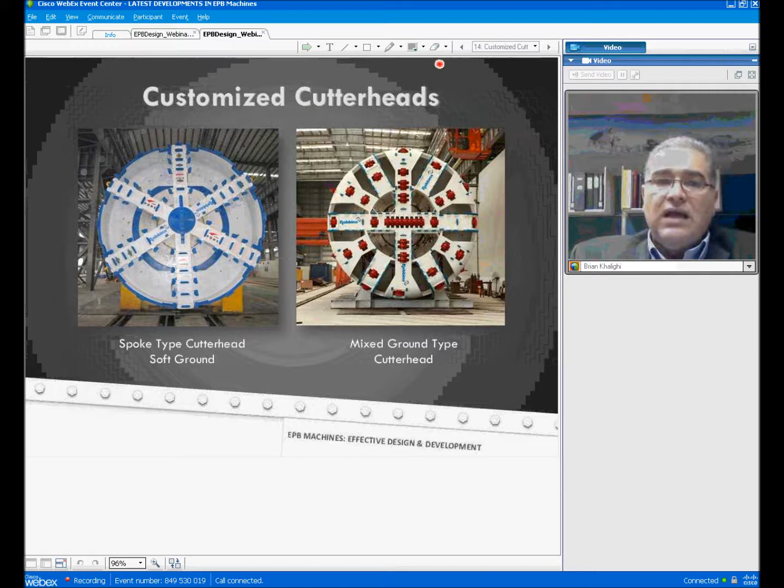In mixed ground conditions, there is a possibility of the existence of boulders, and there's only a certain size of boulders that could be handled and ingested by the ribbon screw conveyors. For that reason, we have to limit the size of the boulders that can enter the muck chamber and eventually into the screw conveyor by controlling the opening size of the Cutterhead. So this one is a fairly closed design of the Cutterhead, and the one on the left is a fairly open design of the Cutterhead. And they both have their own applications.

Obviously, we can install various different cutters on the Cutterheads. For Cutterheads that are designed for mixed ground conditions, we do install single disc cutters on the face and gauge areas, and double twin disc cutters in the center area to minimize the space required for having these disc cutters installed at a proper spacing. And for pure soft ground applications, we have scrapers and knife edge bits, the type of cutters that are shown on the right-hand side. Obviously, in mixed ground conditions, we install a combination of disc cutters and soft ground tools on the Cutterhead.

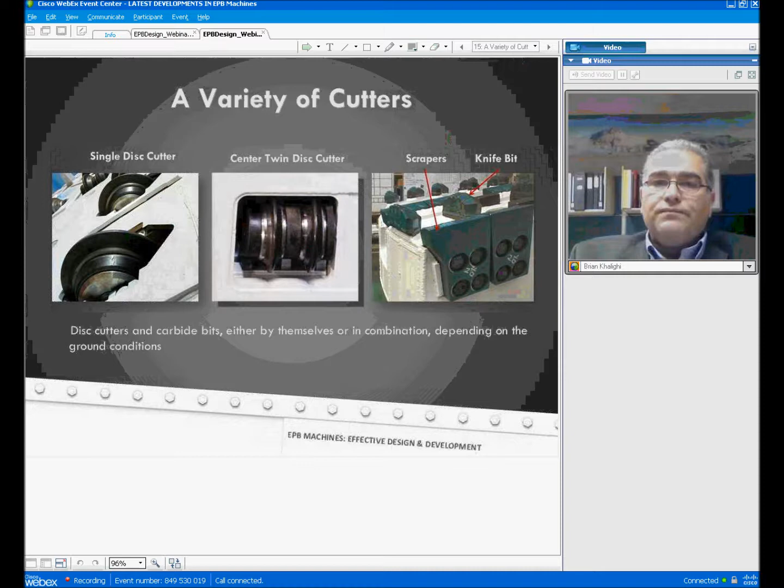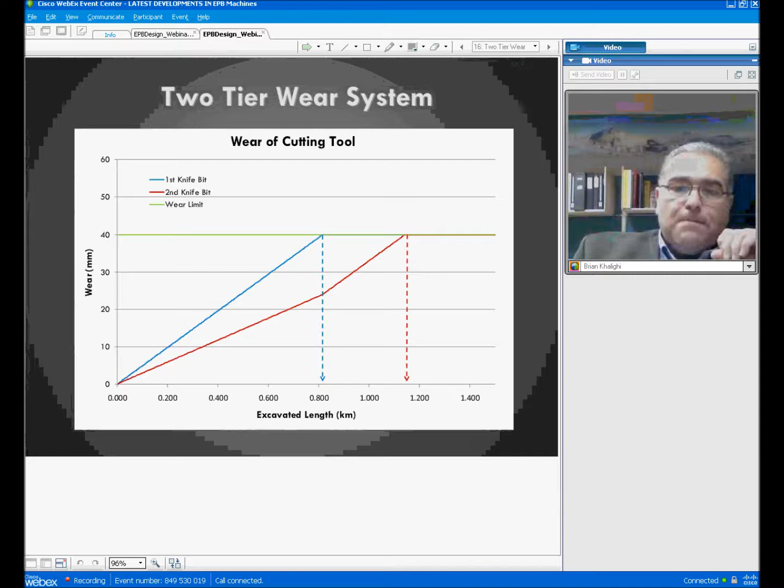One interesting thing that we're doing at the Robbins Company is that these soft ground tools that we install on the Cutterheads, we have two sets of them. One set is installed on the Cutterhead slightly prouder than the second set. In other words, the standoff, the distance from the tip of the cutter bit to the face of the Cutterhead on the first set is slightly larger than the second set. The advantage of this kind of installation is that the first set, which is standing prouder than the second set, obviously wears faster and wears first.

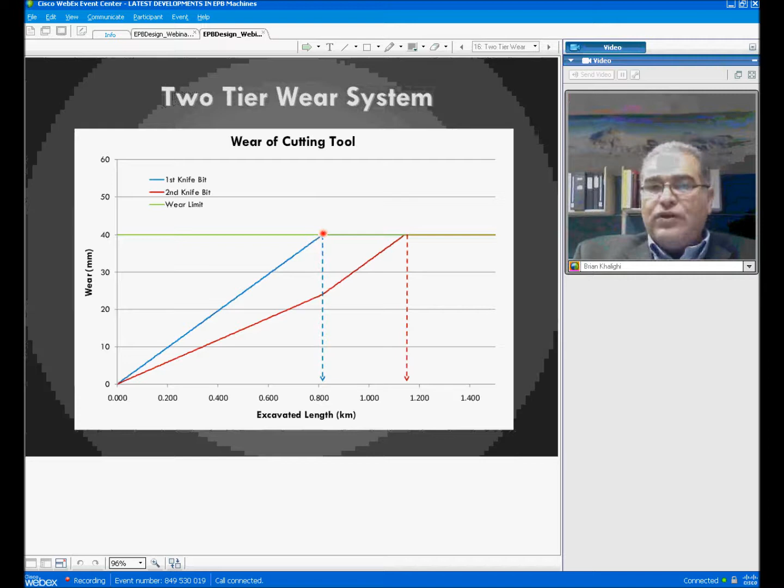And these two graphs are an indication of the wear pattern of those types of installations. The first cutter set, which is shown in blue, let me turn my pointer on. This is the wear pattern of the first cutter set, and let's say that the first cutter set can actually last for 800 meters of tunnel excavation. At that point, these are totally worn out, but the second set, which is sitting slightly below the first set, still has some life left in it, and they continue. The machine can continue boring and excavating for another, let's say, 400 meters, which is 50% of the first set, and that prolongs the productive life of the cutters before the intervention.

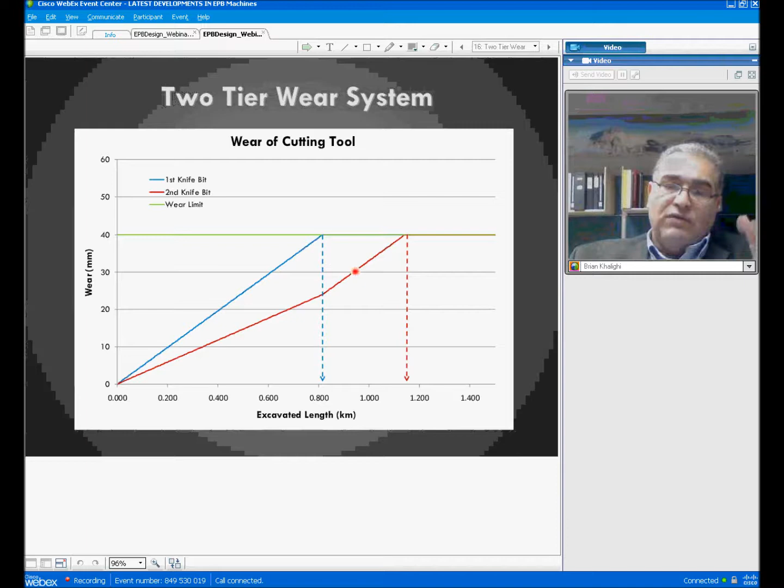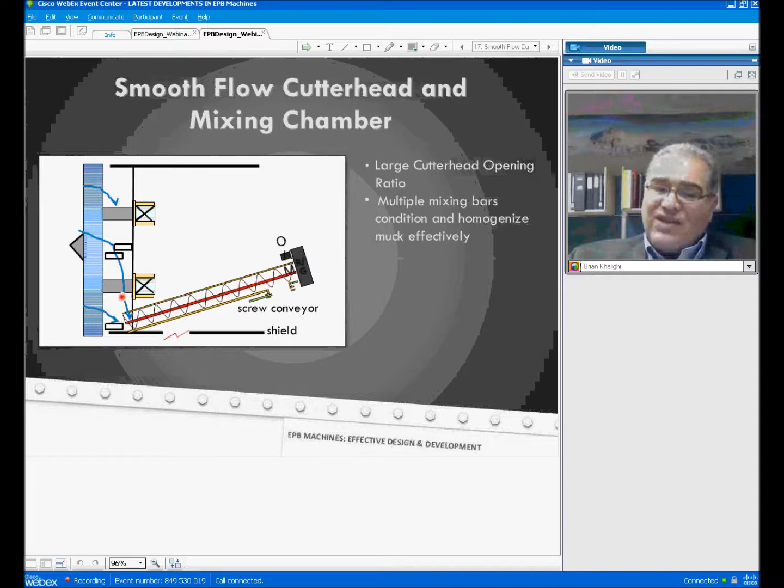Again, smooth flow of the material around the Cutterhead is a very important criterion for design of the Cutterheads. Large Cutterhead opening ratios allow material to smoothly flow from the face to the inside of the pressure chamber or the muck chamber. And another important aspect of Cutterhead design is installation of mixing bars strategically to constantly agitate and mix the muck that has entered the pressure chamber, to homogenize it and to make it flow smoother so it can flow down to the intake of the screw conveyor and naturally feed into the screw conveyor. Mixing bars are very important because if they are not placed correctly, they create areas of stagnant muck, which create problems like high abrasion and lack of proper flow of material into the screw conveyor.

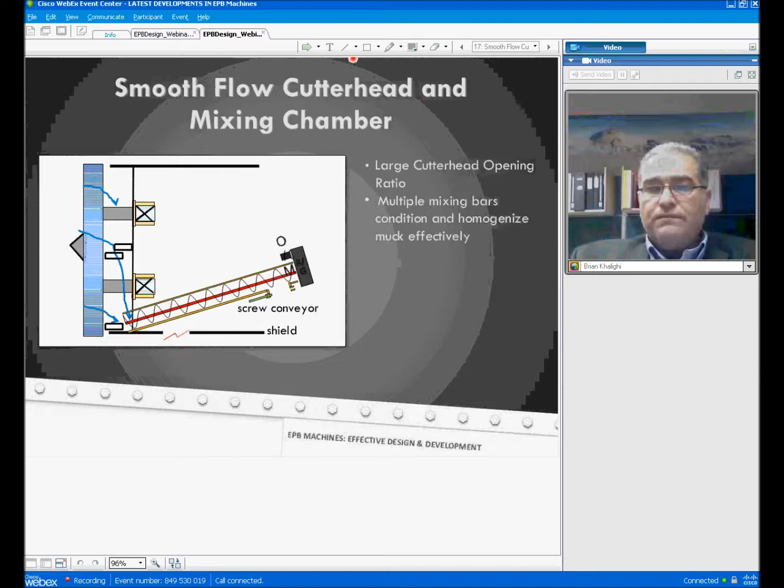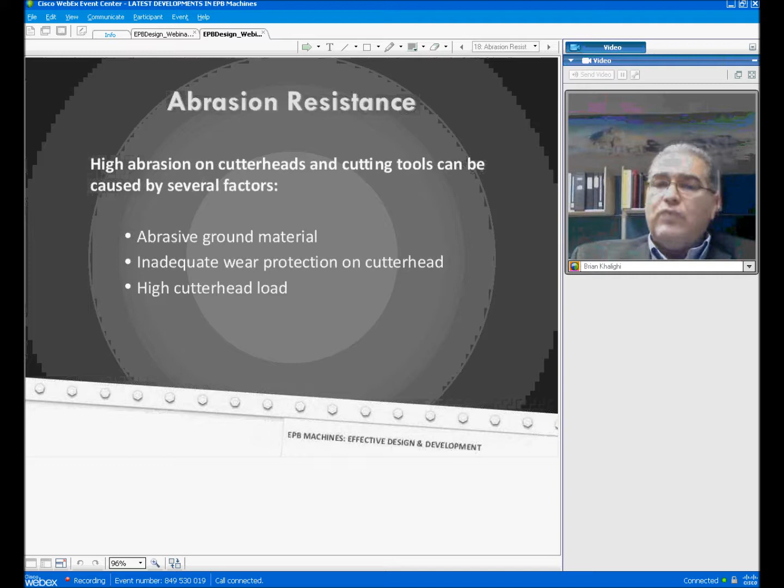The high abrasion on the Cutterhead and the cutting tools can be caused by several factors. Obviously, the first one is abrasive ground material. Then, secondly, it's the design of the Cutterhead. If inadequate wear protection measures are taken, then the base structure of the Cutterhead wears fast. And if there are high loads on the Cutterhead, if the pressure on the face is high, that results in an increase in Cutterhead abrasion. The job is to minimize and to control Cutterhead abrasion.

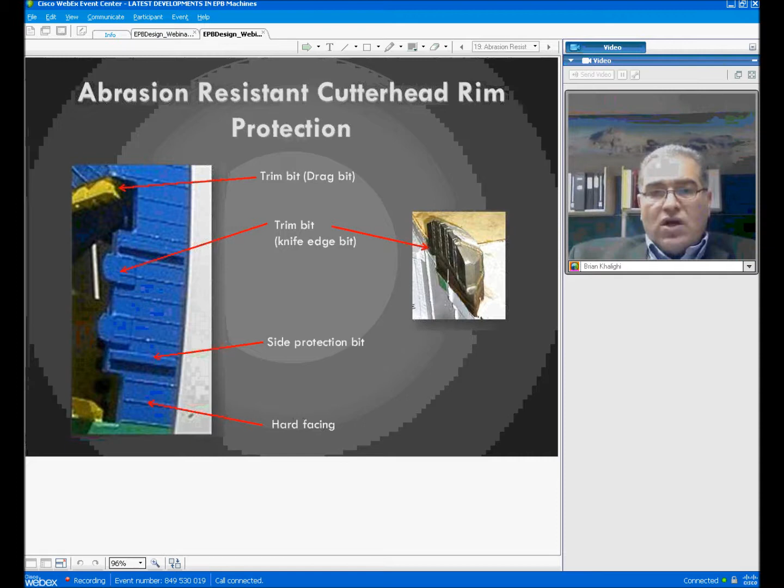We install several wear protection bits and cutters in multiple directions around the periphery and on the rim of the Cutterhead structure. These are trim bits or drag bits, which are shown here, and another type of trim bits, knife edge bits, which are mounted to the rim of the Cutterhead. This structure is basically the outer surface of the Cutterhead, the periphery of the Cutterhead. And then there are side protection bits, which are these bars here impregnated with carbide material, very hard and very resistant. And these are mounted to the rim of the Cutterhead structure at a certain distance and all the way around to protect the base plate of the Cutterhead from abrasion. And the last line of defense is the application of hard-facing beads immediately on the plate that goes around the Cutterhead.

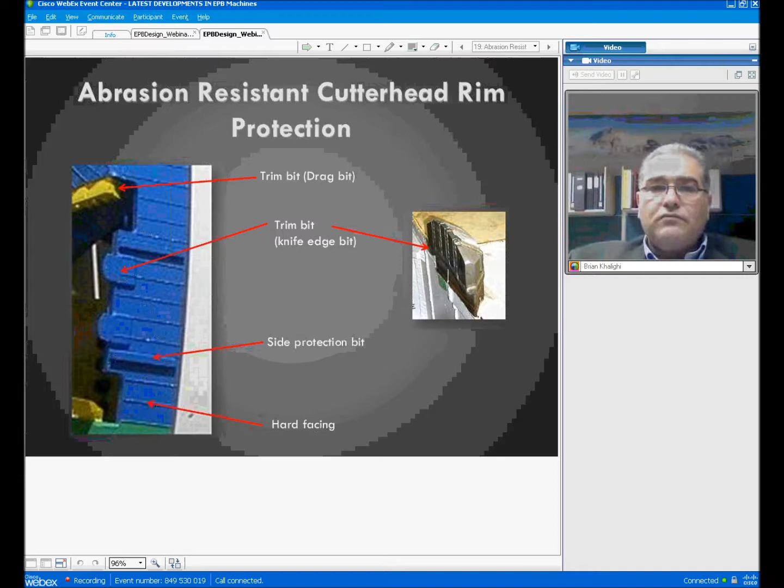So question number 4 is up, and we are ready for the next question from Desiree. This one has 2 parts: what are the most difficult ground conditions for an EPB, and are there certain ground conditions where EPBs should not be used?

Well, I'll ask Mr. Kanda to answer this question, if you'd like to. I can take it if you want. Do you want me to take it? Yes.

The experience has shown that the most difficult ground conditions for EPB application are most challenging. I wouldn't say it's difficult and challenging, but it's not impossible to excavate that kind of ground condition. It's a mixed ground condition, where the lower half of the face is very hard rock, like granite, and the upper half of the face is soil. We typically see this kind of formation in Singapore, and we have been able to excavate that kind of material, but it was challenging. So I guess that is the answer to the question.

Is that fine? Okay, I think we are ready to go to the next slide.

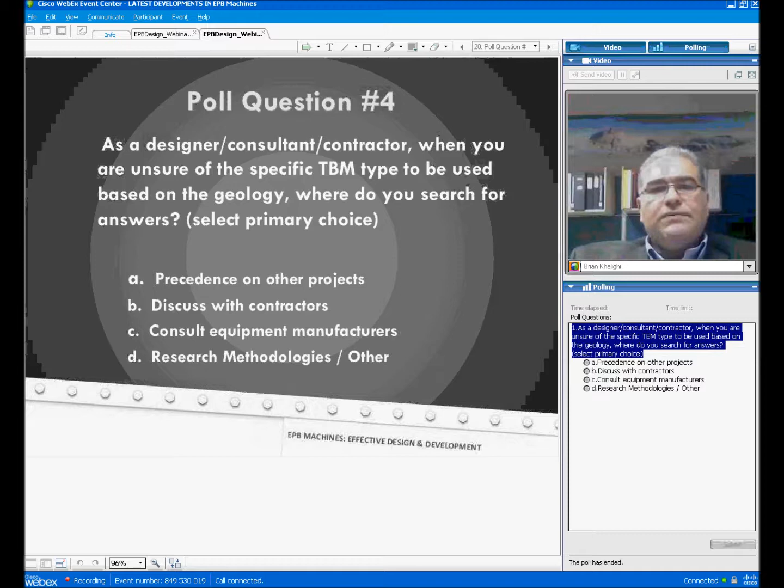Now that you're done with the Cutterheads, we're going to talk about the next very important component on EPBs, and that is the screw conveyors. We believe that the screw conveyor is the answer to many common problems that happen in soft ground tunneling.

Here I will show you a video that basically explains the operation of screw conveyors. As explained at the beginning of the presentation, you will hear the sound on your PC speakers. If you don't see the video, this presentation is being recorded and it will be available online for you to go back to in future and see the video.

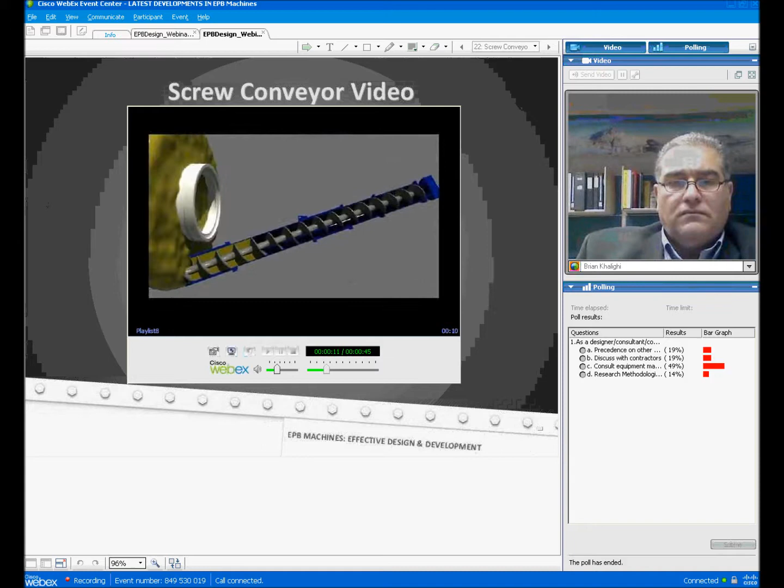Pressure differential between the chamber and the screw conveyor draws the muck into the screw conveyor. As this happens, the muck's pressure is reduced from ground pressure to atmospheric pressure. The depth of the tunnel, the ground material, and the water level above the tunnel determine the ground pressure.

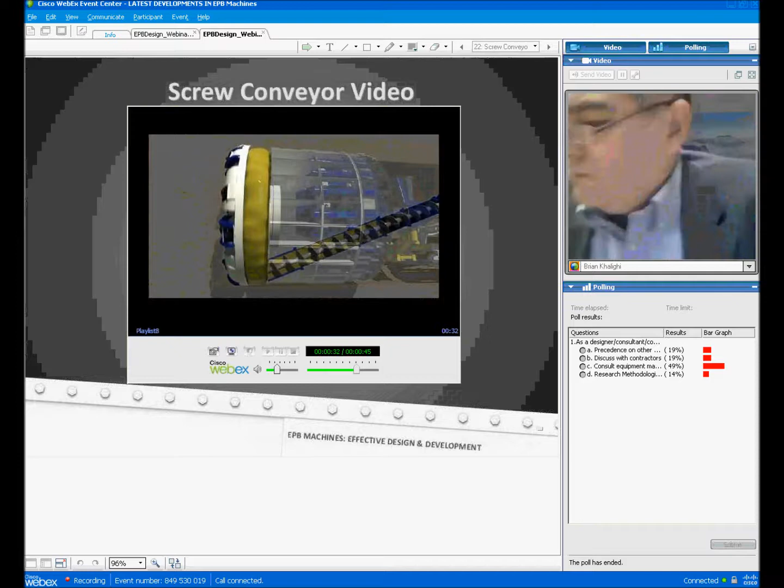In the case of lower ground pressure, only one screw conveyor may be needed. For projects with high ground pressure, Robbins installs two screw conveyors in order to bring down the pressure smoothly. After passing through the screw conveyors, the muck can be transferred to an open belt conveyor and then removed from the tunnel by muck cars or a conveyor system.

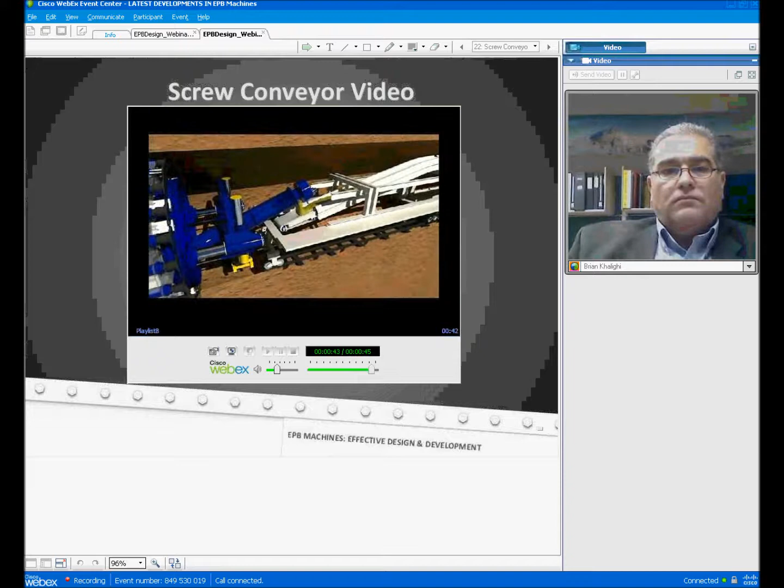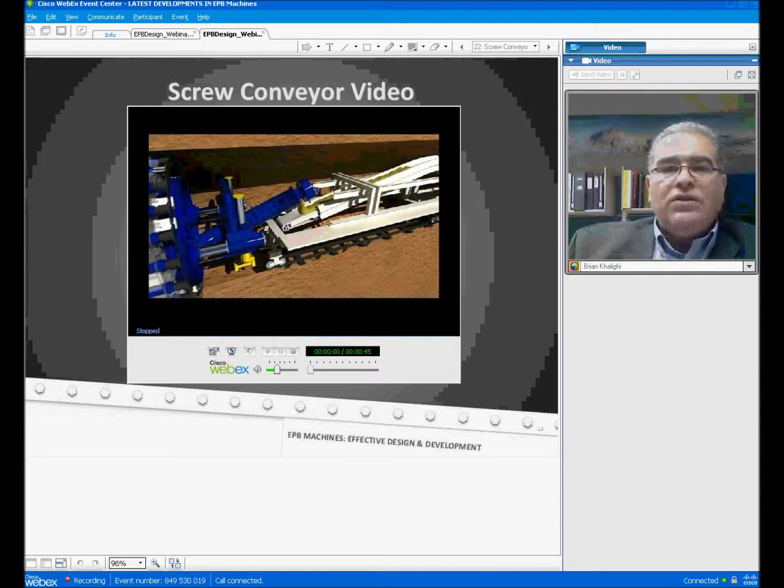I guess we are ready to move on with the rest of the presentation. As I said in an earlier slide, Cutterhead loading is a contributor to the abrasion of the Cutterhead.

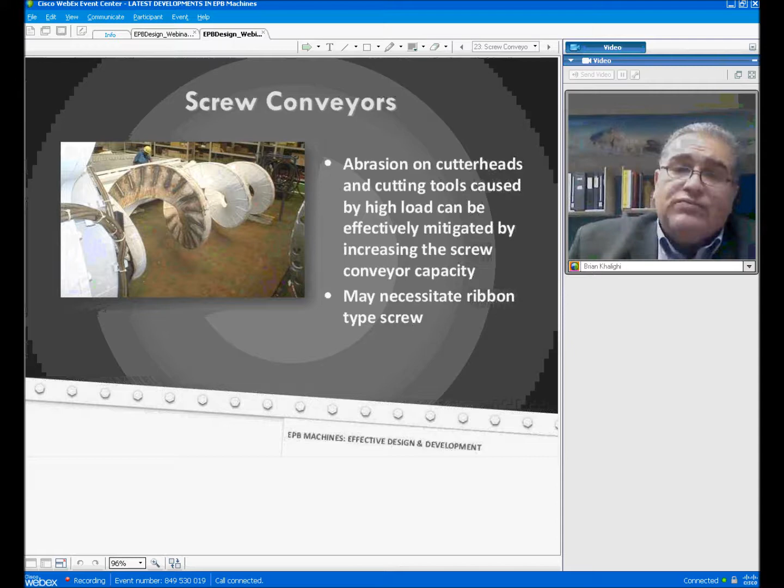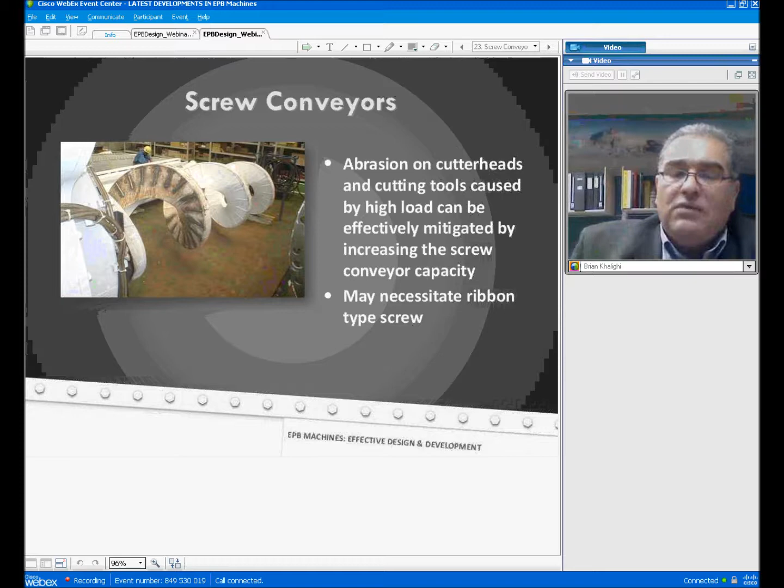To minimize and mitigate the high loads on the Cutterhead, the screw conveyors should be used effectively, and they should have the correct capacity. In some cases, especially in mixed ground conditions, we should have a ribbon type screw that allows removal of boulders from the face. So the screw conveyor actually contributes to mitigation of wear on the Cutterhead by optimizing the material flow from the pressure chamber.

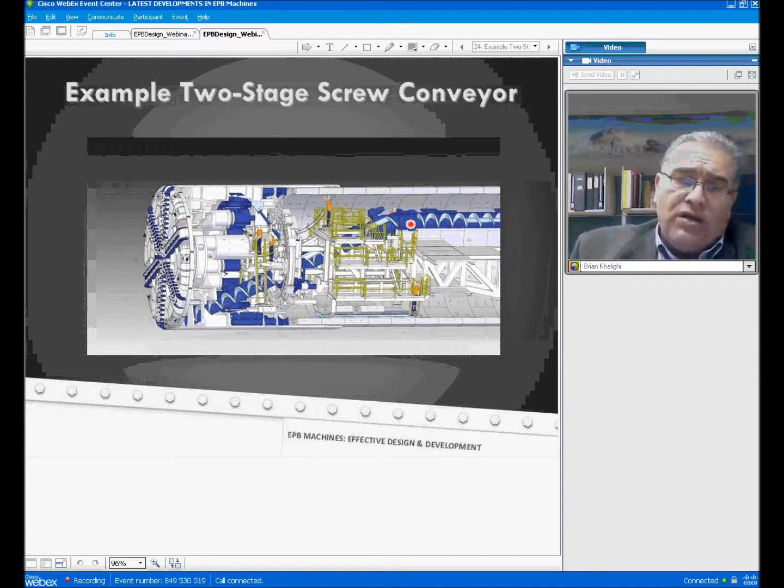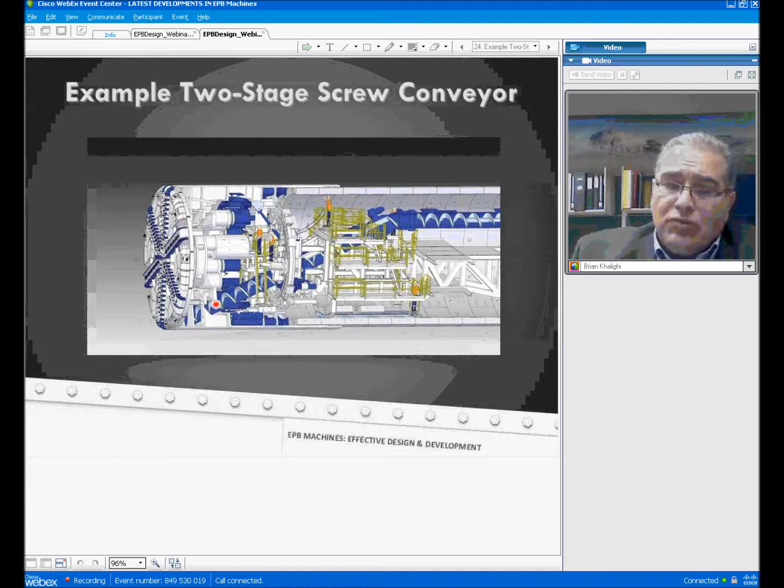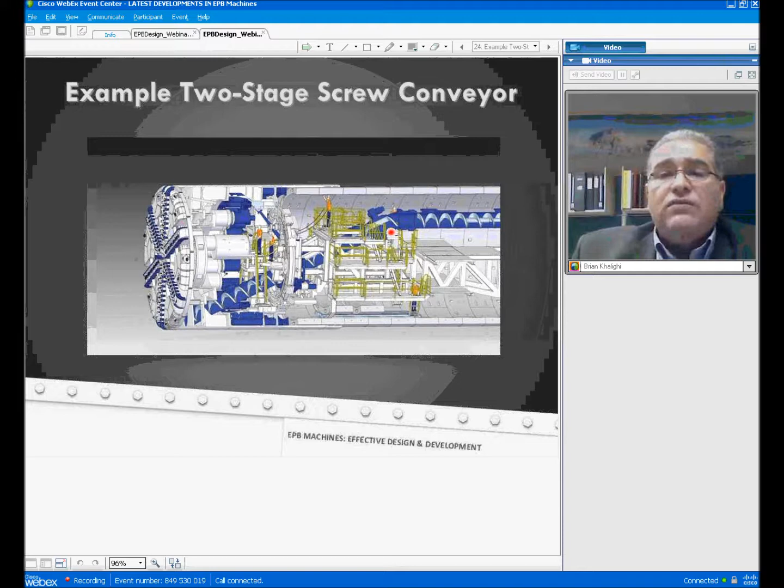In such cases, we can still operate the machine in ground pressures higher than 3.5 bar by sequentially closing and opening the gates on the first screw and pushing the material up the screw to the discharge point. But obviously, in that case, the advance rate of the machine is slowed down to allow us to do the sequential operation of the gates of the screw conveyor.

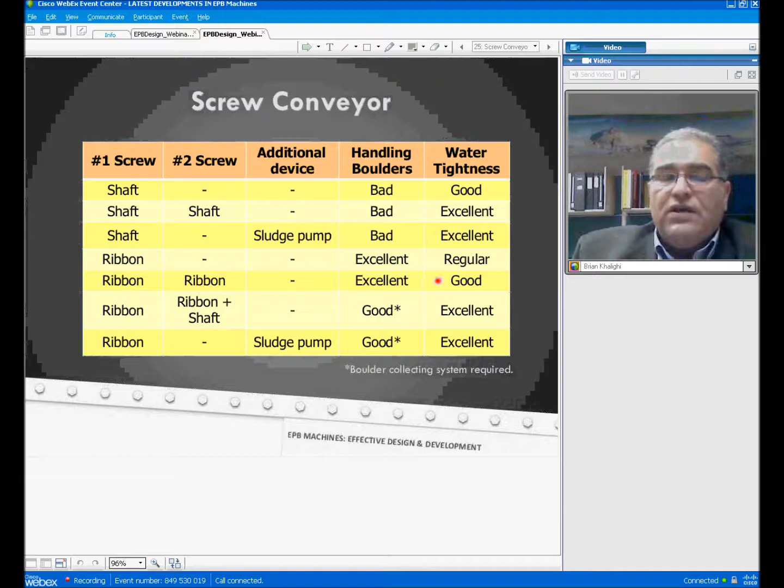This is an interesting table. It basically covers several combinations of shaft screws and ribbon screws and their properties and characteristics. For example, case number 1, when you have only one shaft screw, it's not very good at all in handling boulders, but it has very good water tightness characteristics. If we have, let's say, two ribbon screws, ribbon screws are designed to handle boulders—they have excellent boulder handling properties, and very good water tightness and pressure holding properties. You can see there are different combinations of these.